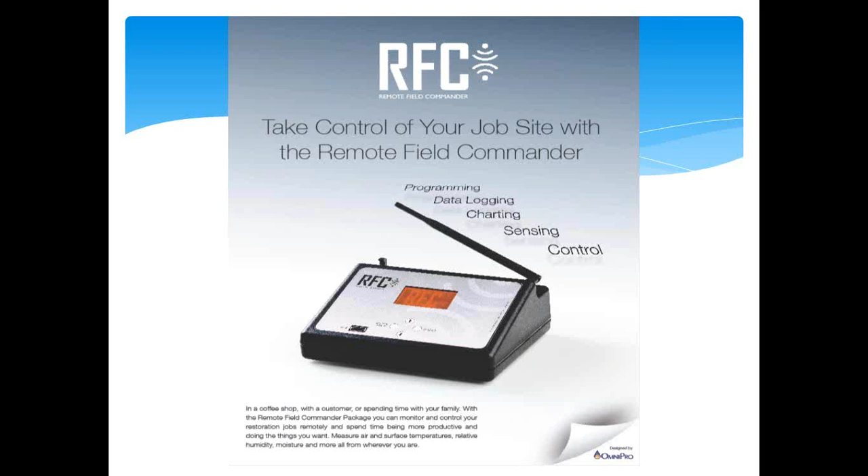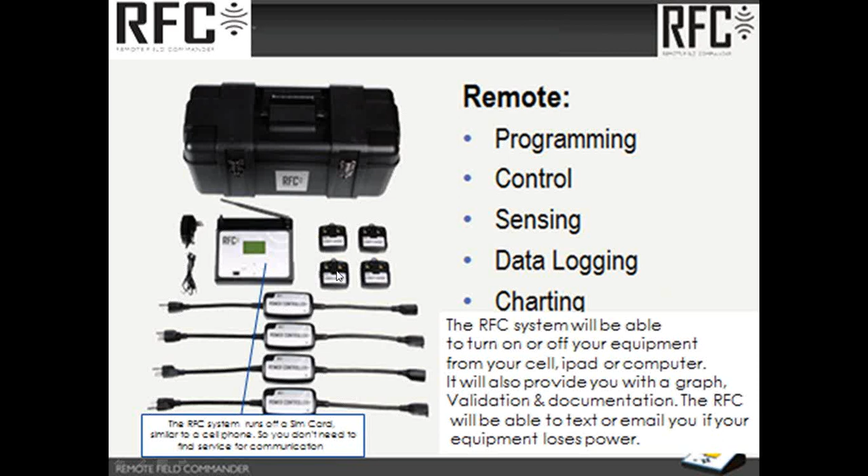This will send a radio frequency to either turn on or turn off, whenever you'd like. The sensors are running off of 5 different readings, giving you air temperature, relative humidity, surface temperature, GPP, and moisture content. So that's 5 different readings at the same time.

All the sensors are going to be in the different rooms, the affected rooms as well as the unaffected rooms, so you can see the comparison. That information is sent to the web browser, and from your cell phone or computer you can turn on or off. You can actually run up to 14 sensors and 14 remote power controllers in one home or commercial building.

There is a monthly service charge for the base station. It's $95 a month. However, in Xactimate, the code WTR remote is $55 a day.

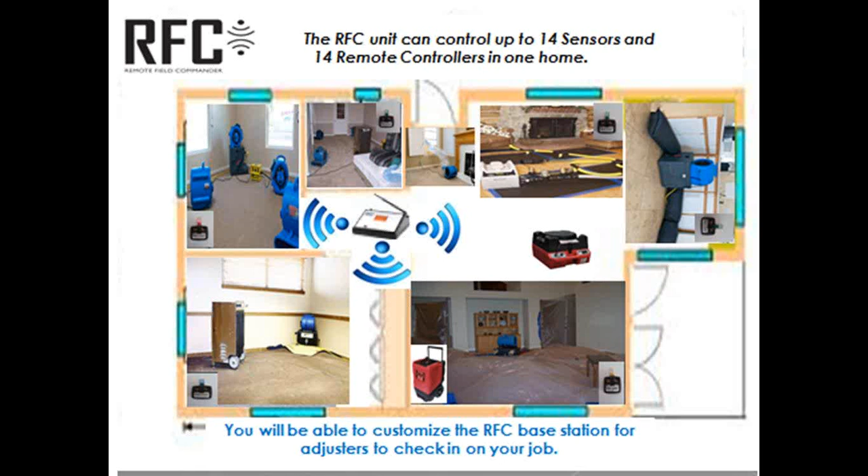If you guys live in New Jersey or New York, you have a job that's an hour and a half to 2 hours away depending on traffic, and you don't need to actually go on the job maybe the second day, but you need and are required by the insurance carriers to have all your data. With this equipment, you can save time and save gas. So if you're interested, let us know, we'd be glad to talk to you a little bit more about this.

It does provide you a graph and a timestamp, and because the information is going into the cloud and you cannot delete or manipulate the readings, you now have third-party verification of what's going on in the environment.

Right now we have a 90-day money-back guarantee trial period. It is $19.95, and there is no monthly service charge for the first 90 days. During the trial period you don't pay any monthly service charge, but if before the 90 days is up you're not happy with it, we will refund your money.

So let's talk about the TES and E-TES. Extraction is still very, very important when we're on a flood job.

However, if you have a TES or an E-TES, the new E-tes low-profile unit now has gone from 22 inches in height down to 13 inches in height. The air mover comes in from the backside instead of on top, and all air movers in the industry now fit. I know we had some difficulties with some other ones, but the design is a lot different now, a lot easier to carry, and we did change the heating element, so we are getting a little bit more heat.

And the unit's only 36 pounds to carry. I will tell you right now that the response from the customers are unbelievable, they just love the system. You will use the E-tes along with your dehumidifier. This does not replace dehumidification, it works with your dehumidifiers, and we'll talk a little bit more about that.

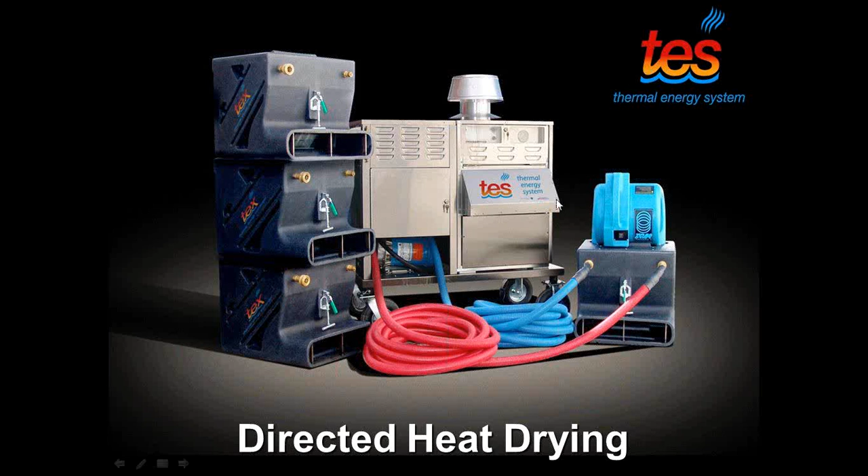Don't forget, we also still have the actual TES unit. This is what we actually started with. This system here runs off of a boiler system. You are going to get a lot more heat out of this system. It only runs off of 8 amps and 1.5 to 2 gallons an hour of propane.

And how the system works is the heat goes through the boiler system, through this red hose, through the gray box, through the blue hose. All it's doing is flowing with hot fluid. The air mover grabs the heat and transfers the heat to where you want it to go.

There is a 200,000 BTU system that you get 4 boxes with, and you can add a 5th if you want. The 250 system comes with 5 boxes, and you can add a 6th. In Xactimate, you're getting $1,700 a day.

But the heat coming out of it, it's super quiet and running only off of 8 amps. You can't beat it.

We do have a demoed unit that's going for $19,995. That's with a trailer. It comes with an E-tes Classic, shelving, propane tanks, you name it. It's ready to go. It comes with free admission to Planning to Win, which is $11.95, and we also pay half of your Reach Drying Academy class, which teaches you how to dry a structure in 2 days using the E-tes and other systems. So if you're interested, give me a call and we can talk a little more about that.

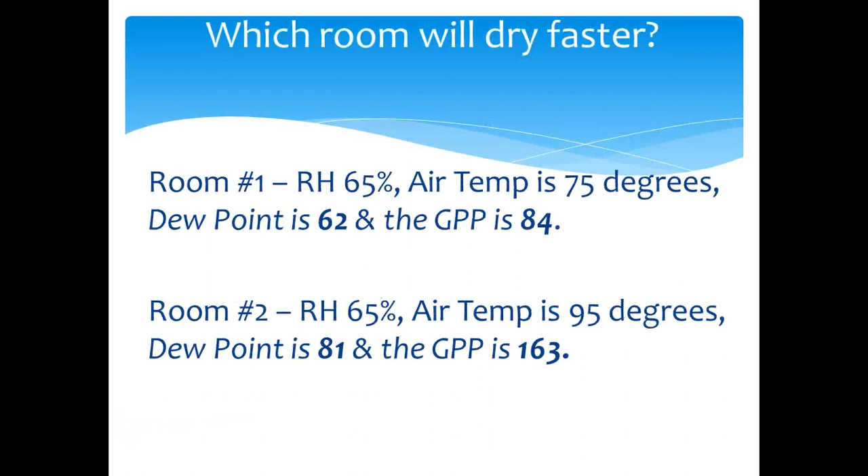Which room will dry faster? Room number 1 has a relative humidity of 65%, air temperature is 75 degrees, GPP is 84. The other room is 65% relative humidity, air temperature 95 degrees, and the GPP is 163.

Now, I did not give you one measurement of readings because you don't track it now, so I'll share it with you later. But which room do you think will dry faster? Most people will say room number 1 because the GPP is lower. Some guys will say number 2 because the temperature of the air is higher.

But if we say number 2 because the temperature of the air is higher, our GPP is off the charts. And we've been taught that if we lower the grains in the room, the moisture comes out of the material. So if we lower the grains, guess what also is lowered? Your dew point. If I lower the dew point, your dehus actually become less efficient. So what dehumidifiers love is high GPP, high dew point. That means you're actually going to get more water in the bucket.

All manufacturers who make dehumidifiers have to do a test rating at AHAM, and it's 80 degrees temperature, 60% relative humidity. But then they do another testing. It's called saturation, and that's at 90 degrees temperature and 90% humidity. The reason they do that is because then they can actually get more water in the bucket, and they'll say, well, we got 130 pints at AHAM, and we got 230 pints at saturation.

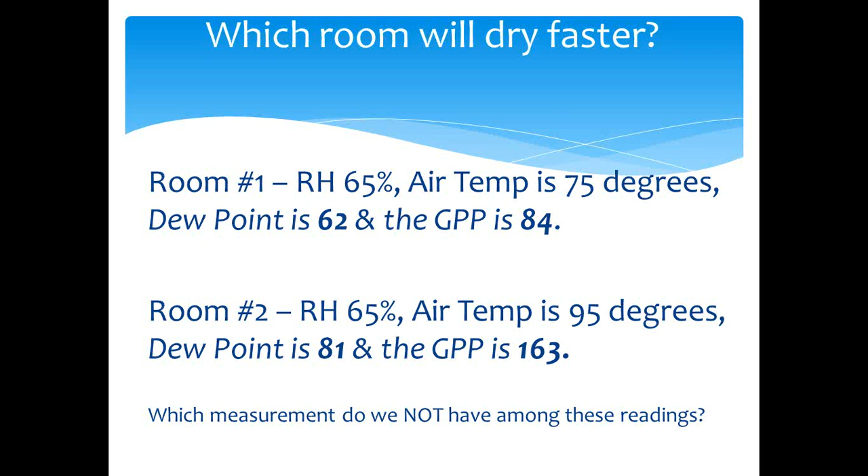So what that really means is this: if the temperature of the air is hotter and there's more humidity in the room, your dehus actually work better. And that's what the TES and E-TES does. It's actually going to make your dehus work more efficiently instead of less efficiently.

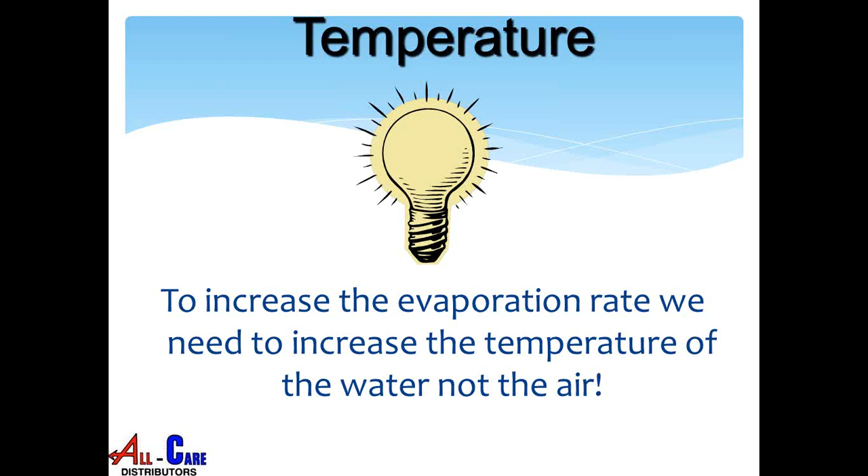Something to think about. Here's a fact: to increase the evaporation rate, we need to increase the temperature of the water, not the air. When you and I were little kids, the teachers taught us, every single time you heat water, it will evaporate. She never said every time you lower the GPP in a room, you'll evaporate the water. Guys, outside of our world of drying, the science of evaporation in high schools, elementary schools, and universities is all based on vapor pressure. And that's what we're going to discuss today.

One of the hardest parts to dry in a wet structure is the sill plate. Okay? You know that, and I know that, right? So the hardest part to dry is in the sill plates. So what happens is a lot of guys cut the drywall because they're afraid of mold, right? Well, let's say Ernie's master bedroom's flooded, and the temperature of the air is 70 degrees.

If the air temperature is 70 degrees, what's the temperature of the wet material? It's not 70 degrees, because that would mean it's the same temperature as the air, which means it's dry. It would be cooler. And then we put air movers across this wet material every 10, 12 feet, because that's what we've been taught. And when the material is wet and we've got air movers blowing across it, guess what happens to the temperature of the material for a while? It actually cools down, and your evaporation slows down.

And that's the reason why, guys, it takes 3, 4, 5 days to dry your wet structure. Now, the reason why the IICRC or S500 already says that you need to track surface temperature, and the new revised S500 is going to say the same thing, is because of this.

For every 18 to 20 degrees that you raise the temperature of the wet material, you double the evaporation rate. Let me repeat that again: for every 18 to 20 degrees that you raise the temperature of the wet material, you double the evaporation rate, or you double the vapor pressure, and that's what creates faster evaporation. So if the temperature of the wet material went from 65 degrees to 85 degrees, you just doubled the evaporation rate. 85 to 105, 105 to 125, you doubled it again.

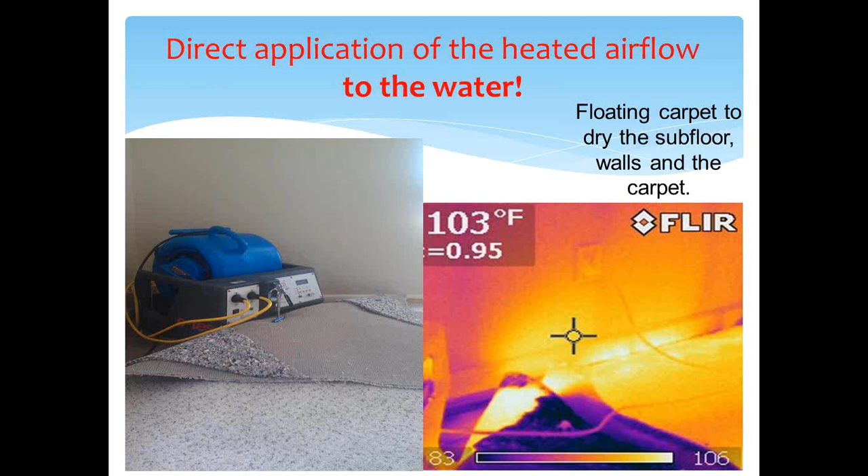So in Dri-eaz, Chapter 7, page 81 of their new guide to restorative drying, it says greater rates of evaporation will occur when liquid water is made warmer and when drier air is moved more rapidly across the wet surface. So what would happen to the rates of evaporation if the water was hotter, not warmer? Then we will increase our evaporation rate.

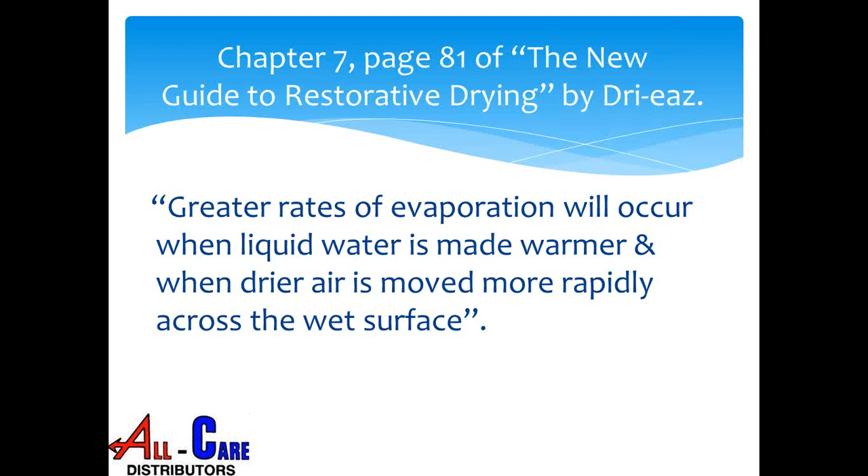So which method would evaporate the water out of the pot faster? I need you to evaporate the water out of the pot. You can put it on top of the stove, or you can put it in the oven at 500 degrees. Which process would dry or evaporate faster?

So we did some testing, and the one in the oven took 120 minutes and 16,000 BTUs, while the one on top of the stove took 24 minutes and 1,700 BTUs. Here's the reason. The reason the oven took so long is the vapor pressure of the water was close to the vapor pressure of the air, and that created slower evaporation.

Here, where all my heat is on the water, the vapor pressure of the water is so much higher than the vapor pressure of the air, and it created faster evaporation.

So when we're drying with conventional dryers, dehus and air movers, gentlemen, your vapor pressure of the wet material will always be close to the vapor pressure of the air. Always. That is the reason why it takes you so long to dry a structure.

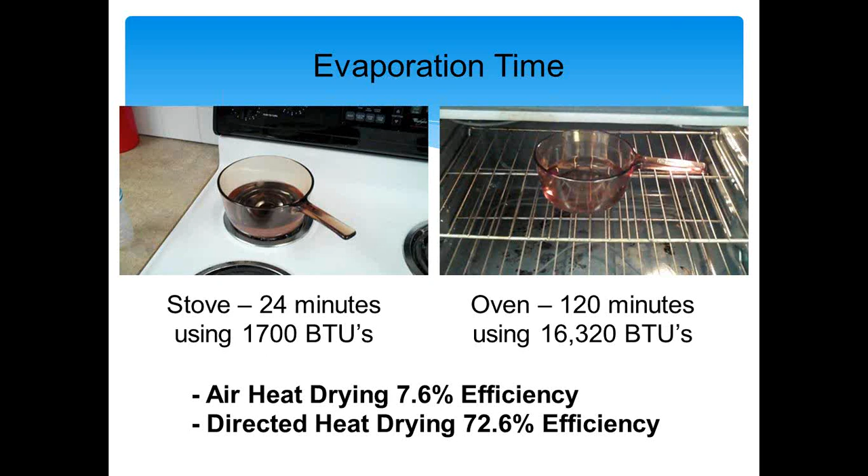So if we can float, tent, contain, direct, and keep the heat to the wet material, and increase the temperature of the wet material, that will increase your evaporation rate and dry your structures faster.

So one TES is good for up to 500 square feet. And for every TES you have to have a large dehumidifier or an exhaust in there. So that's your equation right there.

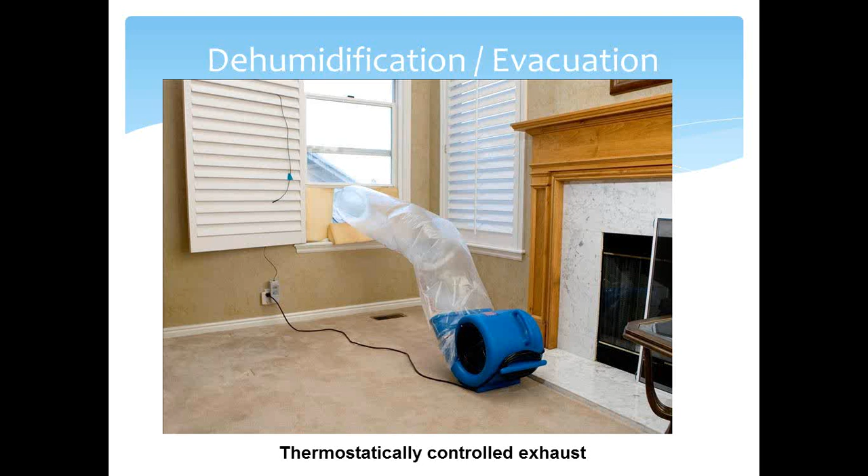Then what happens is, after we're done, the industry usually puts these mat systems down, and then we get some air movers and some dehus in the room.

And where does heat naturally go? It goes up. Where's your water? It's down. So that's like your wife taking her blow dryer in the morning and aiming the blow dryer up in the air to dry her hair. You'd be like, honey, what are you doing? Oh, I'm drying my hair. I'm gonna heat the air first, and then that'll dry my hair. You'd be like, honey, why don't you just aim the blow dryer to your hair? That'll help faster. And then it works.

That sounds like a simple idea, but when you guys are just using air movers and dehus and you guys are just drying the air, that's like you taking your blow dryer and aiming it up in the air. We want to get the heat to the wet material. So on a wood floor, we're going to tent it. We're going to keep the heat down low. Wherever the water goes, the heat's going to go. And every single time we heat water, it will evaporate.

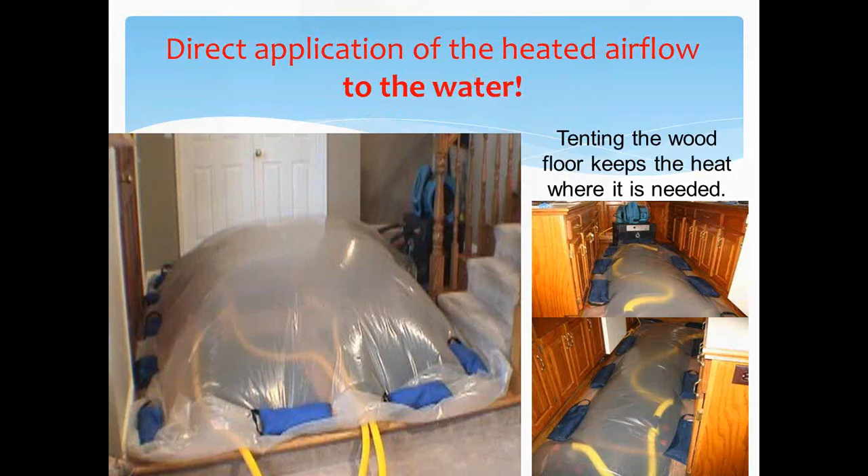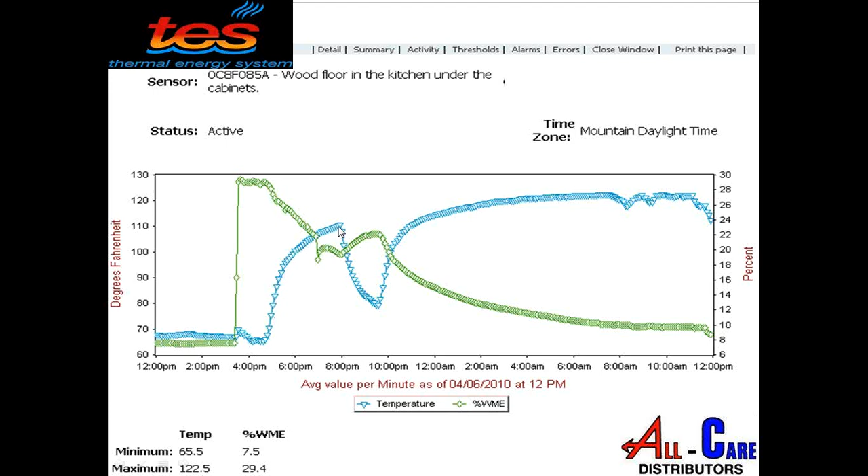Now guess what's happening to the water? It's evaporating. Now if we did not heat the water, how long would this take to evaporate? It's based on science, guys. Every time we heat the water, it will create faster evaporation. You can't deny it.

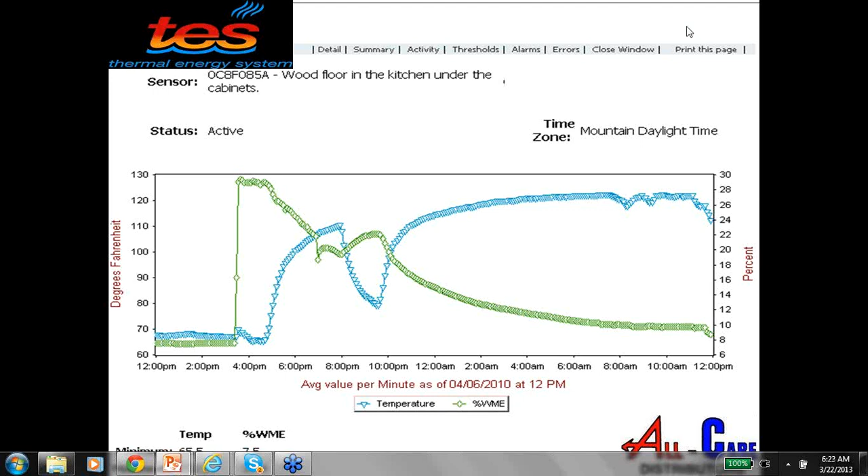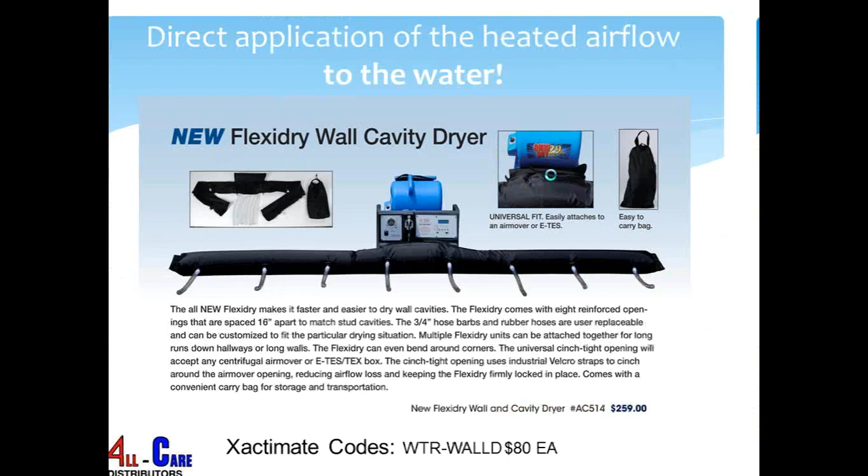Another way of directing the heat would be the Flexi Dry unit. There's Velcro on each side of the Flexi Dry, so you can actually add up to 5 units to one E-TES. And in Xactimate, this is $80 a day. So for every Flexi Dry unit you use, it's $80 a day. So if you just use 4 of these, that's $320 a day in addition to the E-TES and air mover at $225 a day.

And inside the wall cavities, we've got the heat going in. So for commercial units, homes with brick, plaster, concrete, drywall, doesn't matter, figure out where the water's at, get the heat to the water, and that's going to create faster evaporation.

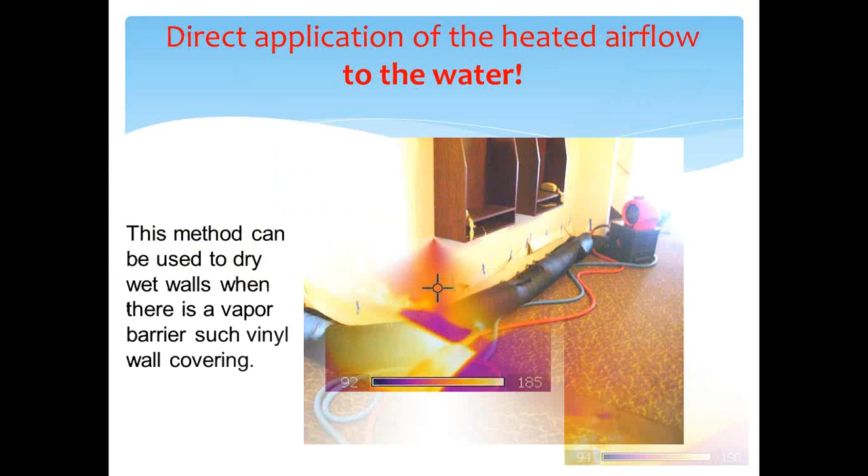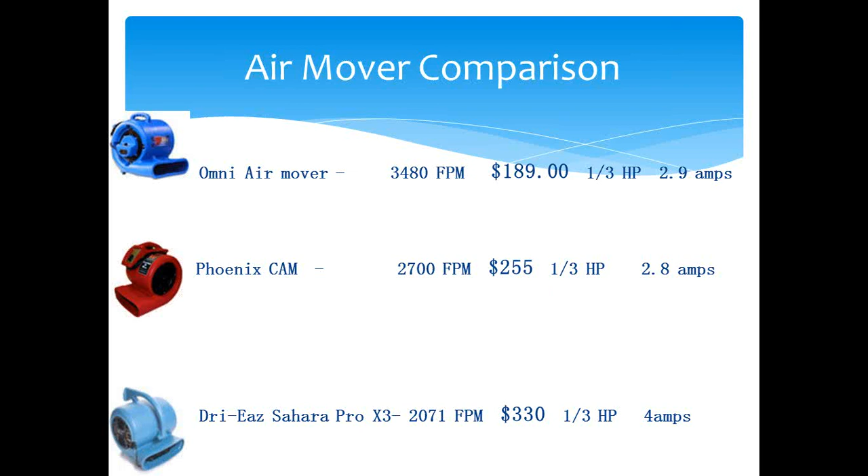The air mover we'd highly recommend is the OmniDry 2.9 amp. It has a daisy chainable feature on it. It's got a 2-speed. And it actually has the highest feet per minute rating in the industry right now at 3,480 compared to the Phoenix and the Dri-Eaz. And you know what, guys? What air movers blow out is air. It's not magic air. It's just air. And for the price of air movers, why spend $330 when you can spend $189? And the warranty is great. And the dependability is amazing.

So that's an option. Now what does the IICRC S500 say? It says heat accelerates evaporation. Heat should be applied directly to the materials. Now this is what today's S500 says. The 2006 version: restorers should manage both air and surface temperature in order to enhance drying and avoid potential-related damage.

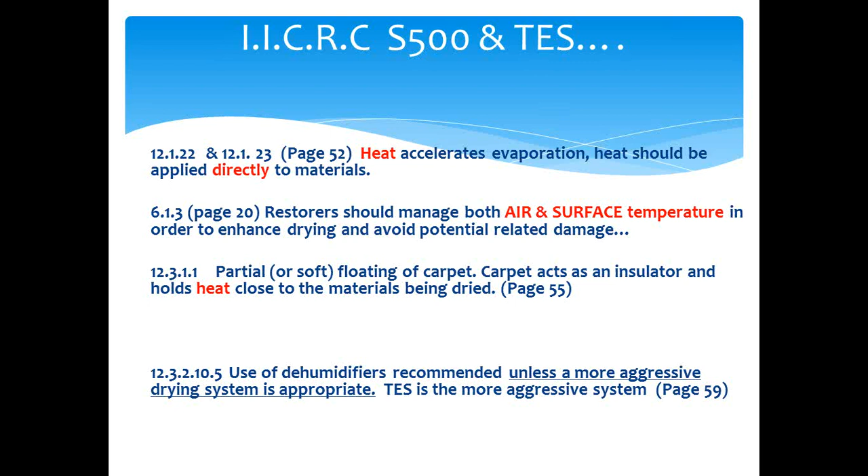Partial or soft floating of carpet. Carpet acts as an insulator and holds heat close to the materials being dried. So when we float it, the carpet acts like an insulation blanket and keeps the heat right where we want it to go. We also have in the S500 it says drying walls, solid wood floors, the underside of subfloors can be accelerated by applying heat to the materials. So I got an E-TES on its back aiming up. I got a reverse tent, and my ceiling or my subfloor is 140 degrees.

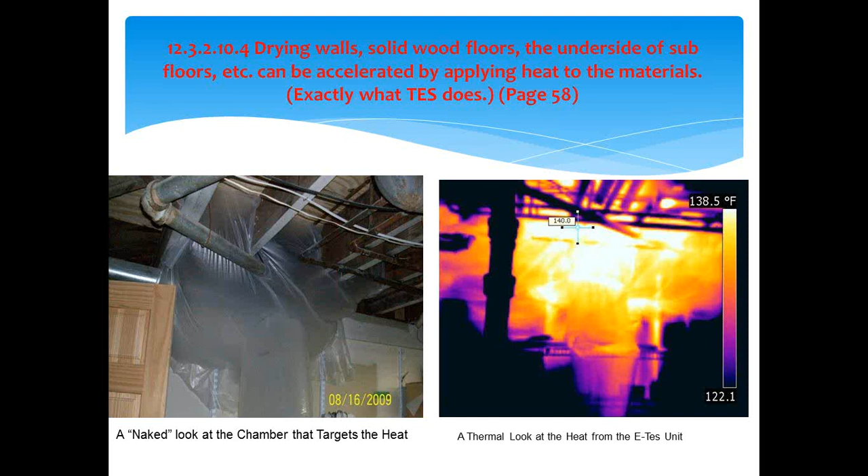Guys, the subfloor is 140 degrees, I'm going to dry that fast. So if I have a wood floor on top, I've got my mat system, I've got that tented, I've got a reverse tent going on. It's going to dry fast, right? It's simple science. So we go back to room number 1 and room number 2.

The one thing I didn't tell you was that the surface temperature in room number 1 was only 70 degrees, and the surface temperature in the other room was 115 degrees. The reason I didn't tell you that is because right now, guys, you don't track surface temperature. So you didn't care about it in the beginning. But if you change the way you look at things, the things you look at will change. Gentlemen, you really need to start tracking surface temperature. It's going to help you keep track of your evaporation rate faster.

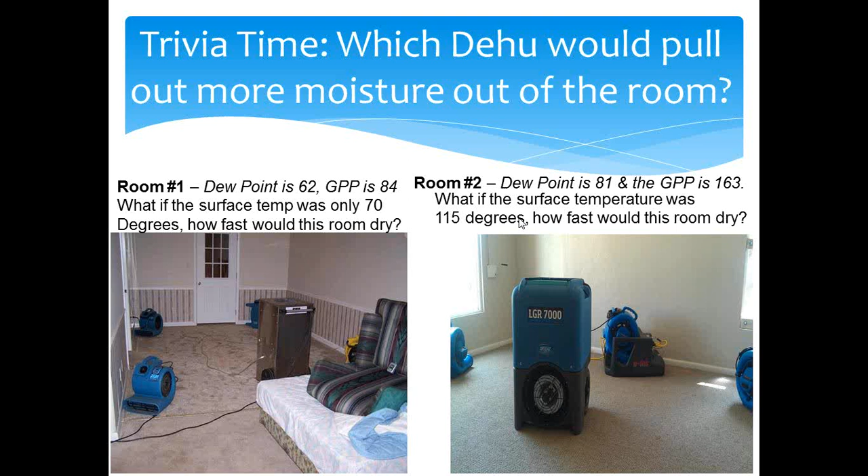What's also in the S500 is the actual definition of psychrometry. It says evaporation occurs if the vapor pressure of the air is lower than the surface vapor pressure of the material. That's the reason why they teach you to lower the grains in the room. If we lower the grains in the room, you lower the vapor pressure in the air below the material, and that's what draws the moisture out. But if we reverse the definition, if you increase the vapor pressure of the wet material higher than the vapor pressure of the air, that will create faster evaporation.

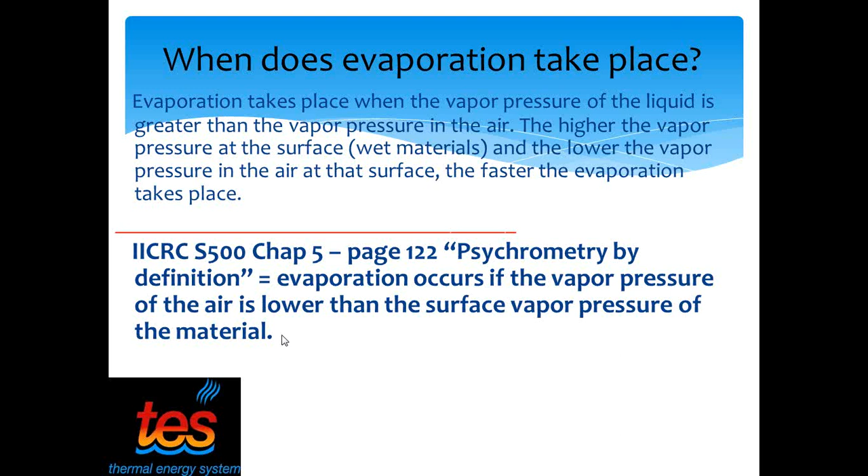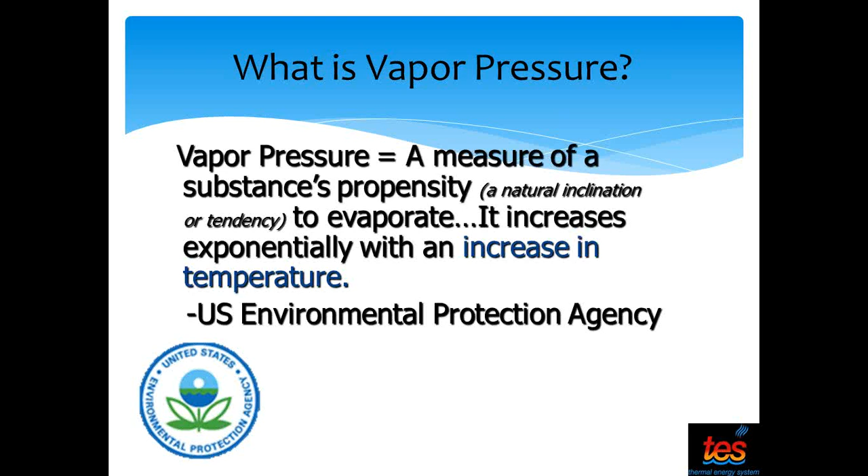What is vapor pressure? Vapor pressure is a measure of a substance's propensity to evaporate. It increases exponentially with an increase in temperature. That's not from TES, not from Dri-Eaz, not from Phoenix, that's from the EPA. That's based on science. The only way to increase vapor pressure in a wet material is to increase the temperature of the wet material. A lot of you have thermal imaging cameras, and if you don't, you need to get one, okay?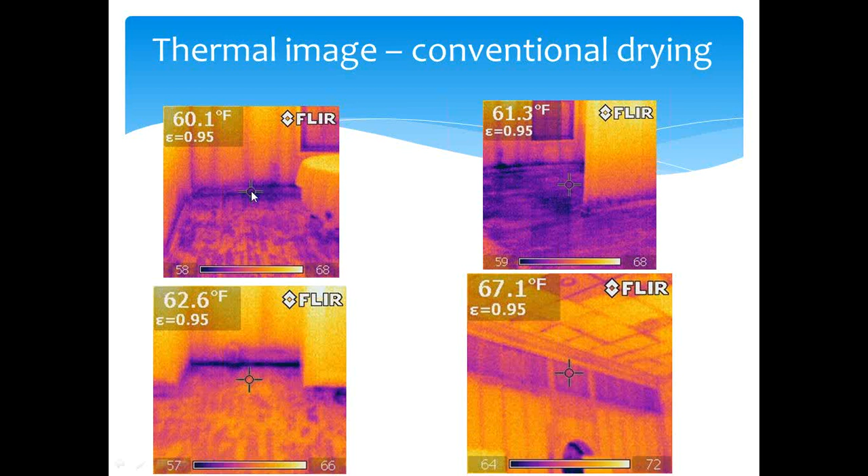Because the technology is amazing. In this picture here, we see that the sill plates are the last part to dry, and that heat rises. So at 60 degrees, do you think you're really going to dry that out fast? No, you're not. But if we direct the heat by floating the carpet, tenting it, containing it, now my sill plate's 132 degrees. Gentlemen, at 132 degrees on the wet material, you know you're going to dry that out fast. And guess what? The baseboard's still on there.

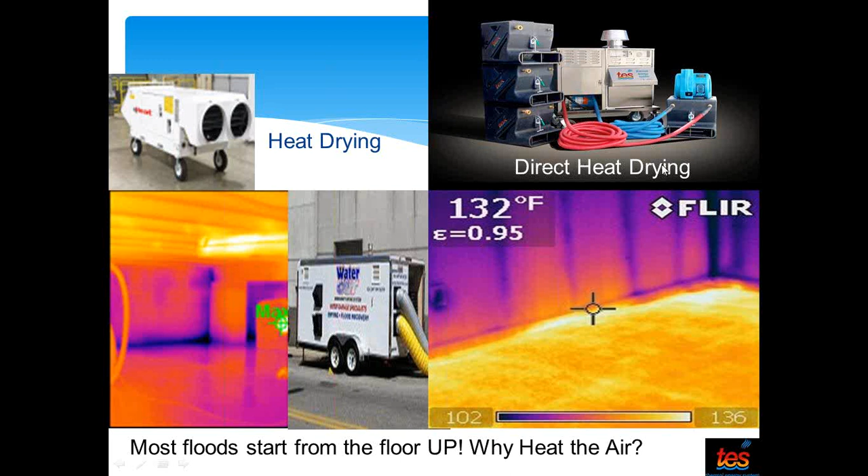Some of you are already thinking, well, I'll just heat the room up. The heat will go to the ceiling and your sill plates will still be the last part. That's why there's a difference between heat drying and direct heat drying with the TES and E-TES. And here again, we're floating the carpet. My baseboard's still on there. And where's all my heat? Right at the sill plates.

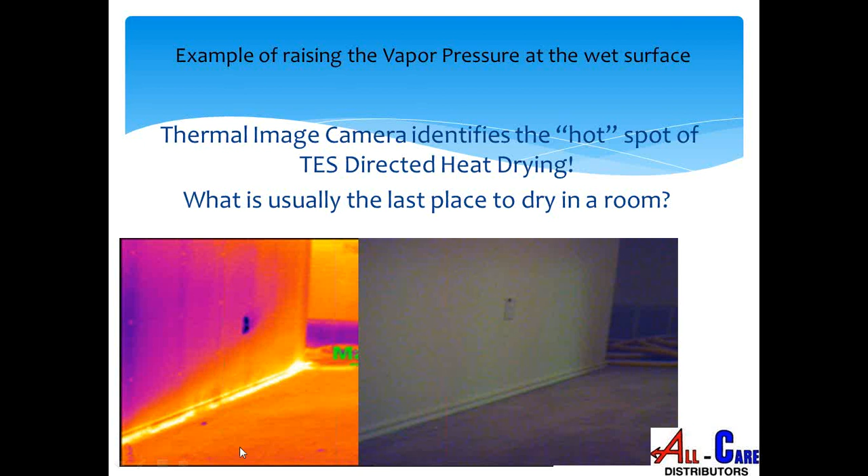There is no way, guys, you're ever going to see this picture if you are just using air movers and dehus, or if you're just going to heat the room up, because heat rises. I need my heat right at the sill plates. That's going to help me dry my structures faster.

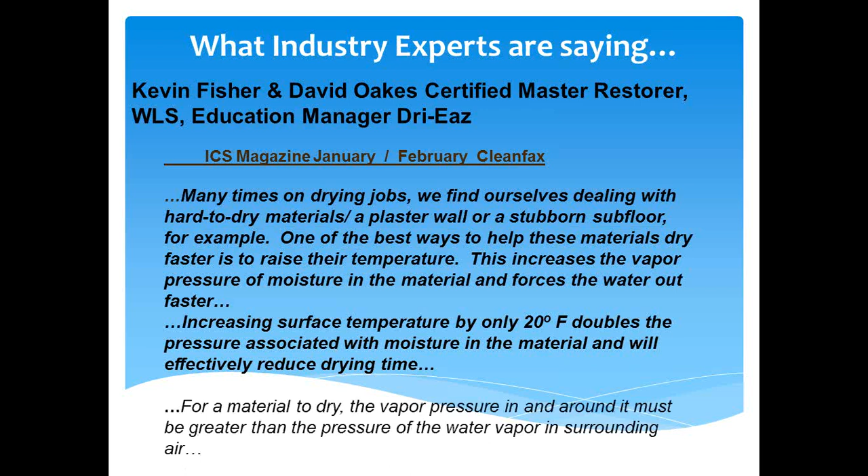So what are the experts saying? Kevin Fisher and David Oakes say, many times on drying jobs we find ourselves dealing with hard-to-dry materials, a plastered wall or a stubborn subfloor. One of the best ways to help these materials dry faster is to raise their temperature. This increases the vapor pressure of the moisture in the material and forces the water out faster. Increasing surface temperature by only 20 degrees doubles the pressure associated with moisture in the material, and we effectively reduce drying time. Guys, this is not new. It's been around a lot, but it just hasn't been promoted in the classrooms.

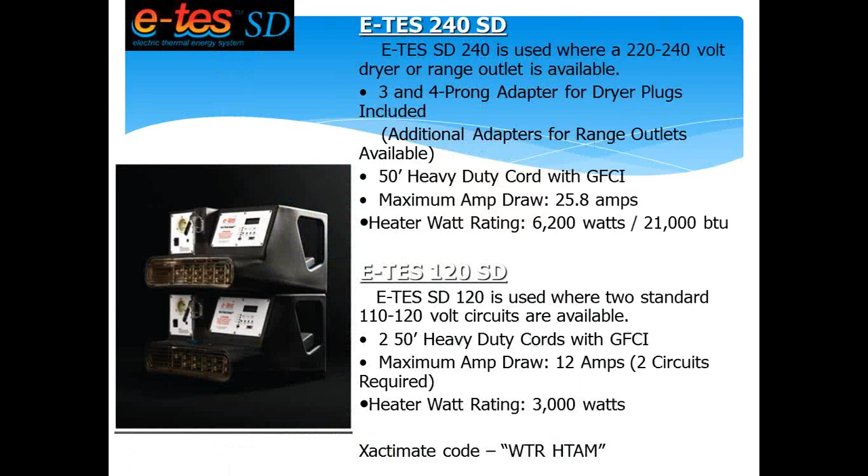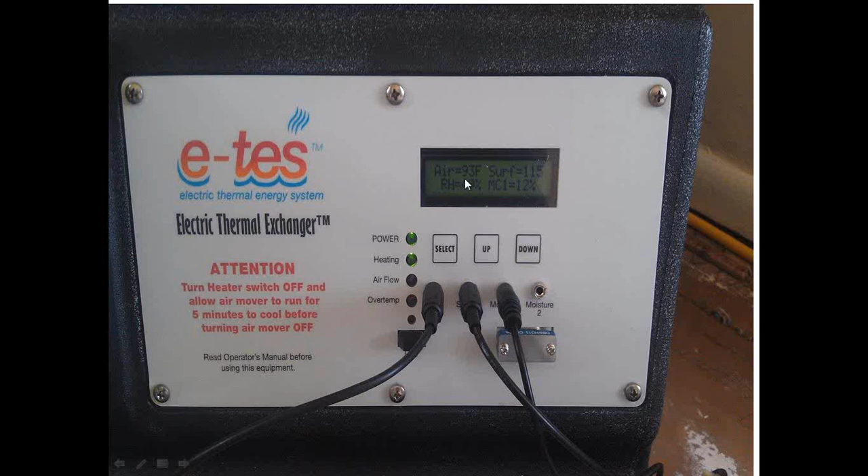So the E-tes low-profile unit, let me show you that you can actually turn on and off the system all by itself. On the screen, it's actually going to tell you what the air temperature is, your surface temperature, your relative humidity, your moisture content percentage, and there's 3 ways of turning off the E-tes. One is the moisture content percentage.

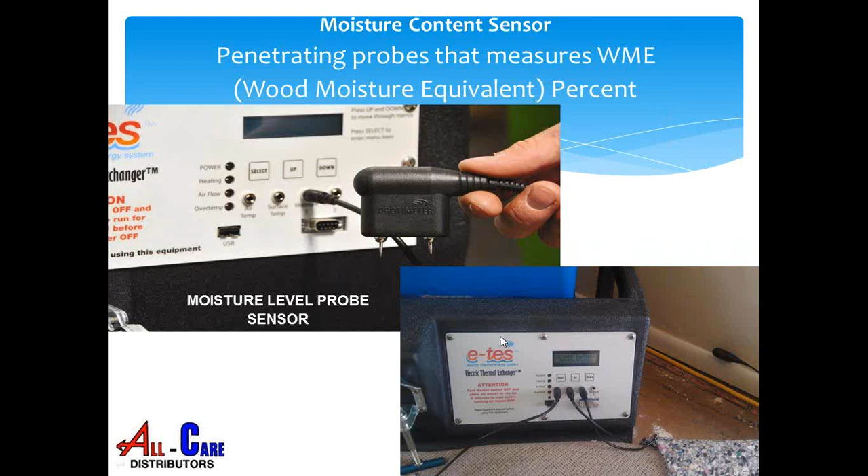So what happens is you always have to find the dry standard, right? So let's say your dry standard is 12%. So you're actually going to input that into the E-tes, and these pins are measuring moisture percentage and surface temperature. So you put these into the sill plate, the drywall, the wood floor, whatever you like. Once it reaches the dry standard, it'll turn off the heating element and stay off. So you don't need to worry about over drying anything.

The other one is the air temperature. Let's say I don't want the room temperature to get over 100 degrees. Not a problem. I'll set the E-tes at 100 degrees. I'll put this at eye level, 6 feet maybe, tape it to the wall, and once it reaches 100 degrees, it'll turn off the heating element. At 97, it'll go back on. It turns it off, turns it on, turns it off, turns it on.

Now some of you right now are thinking, you know what, that's too hot for the customer, they're not going to like it. So my question to you is this, and you can offer this to your homeowner. Mrs. Jones, I have an option. I can dry the structure in 4 days, or I can dry it in 2 days. If I dry it in 2 days, it's going to be pretty warm and pretty quiet. If I dry this in 4 days, it'll be a lot more comfortable and very loud. What would you like? And what do you think the homeowner's going to do?

She wants this nightmare to end. But you're also going to make basically the same amount of money in 2 days instead of doing it in 4 days. It also has a remote exhaust controller, so you can set the air temperature exhaust at 95. It'll send a radio frequency and turn on your exhaust if you want. It'll turn it on and turn it off.

Surface temperature sensor, you set this to take it down to the wood floor if you like. And let's say you don't want the wood floor to get over 110, 115 degrees. So we tent it, set the temperature, whatever temperature you like, and it turns off and turns on, turns off, turns on. It's kind of like having a technician on the job.

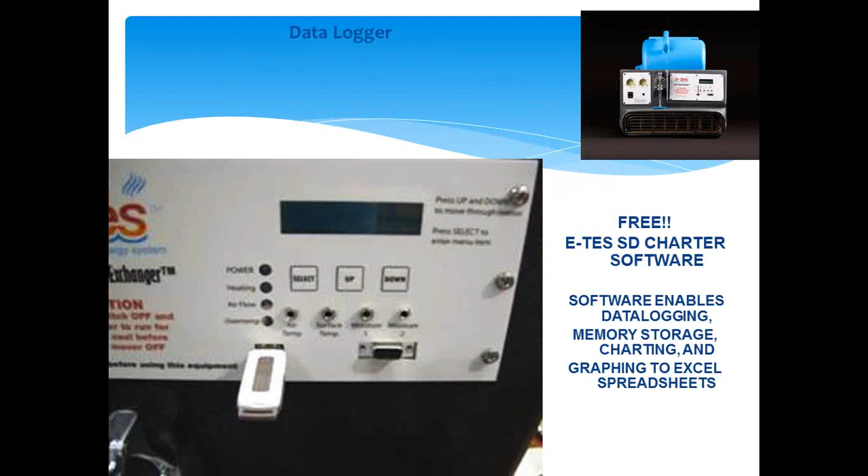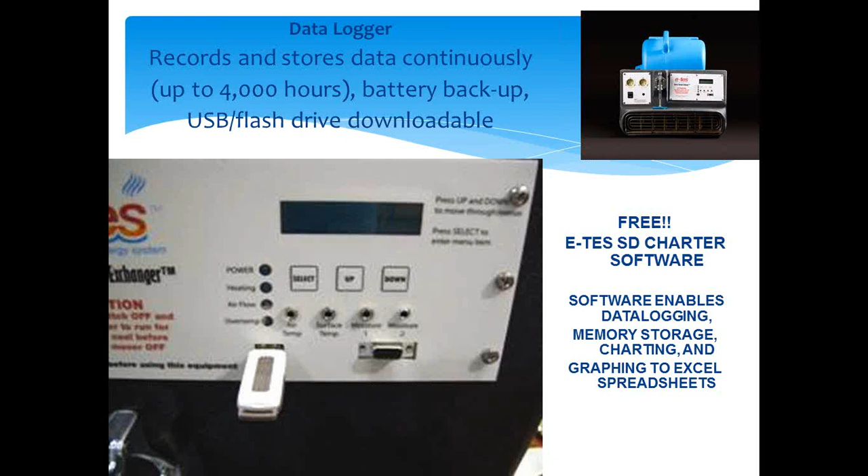The E-tes also is a data logger. Software is free. What happens is you download the software from a website at testdryingsystem.com. When you go check on the job, turn off the E-tes, put in your flash drive, put it back on. It downloads all the information, and now you have a graph to document everything that's going on.

I do CE classes around the country. And let me tell you the biggest difference that I've learned in 3 years from the insurance side, and this is from the East Coast to the West Coast, north to south. The biggest difference between an independent restoration company and a franchise is this. 30% of the independent restoration companies document and validate their jobs. 85% and plus for franchises document and validate their jobs.

That is the biggest reason insurance carriers like to use franchises. Guys, you have DUs, you have air movers, you have great customer service, you have the knowledge, but you're not documenting the jobs properly.

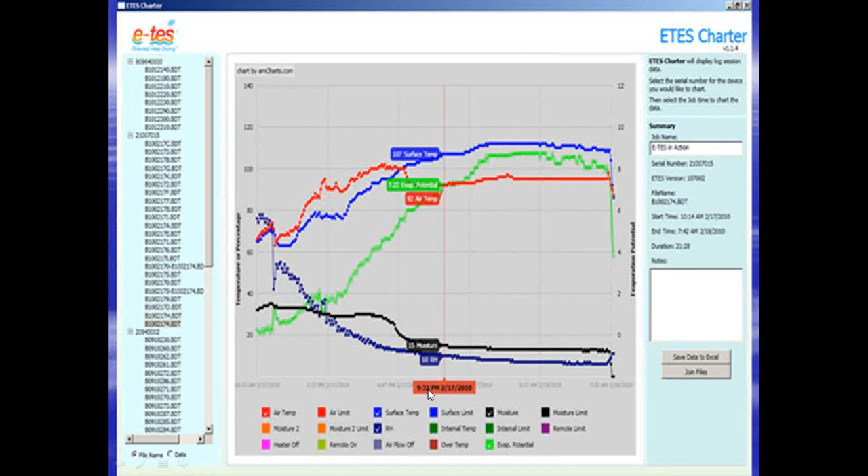So that means 70% of the independent restoration companies do not document or validate their job as done. And with this promotion of the E-tes as well as a remote field commander, now you will have charts and timestamps of what's going on in your environment. So the E-tes will give you 16 different readings. You just click on which graph you want to see. So we have surface temperature, air temperature, relative humidity, moisture content, time, date. You have all that documentation.

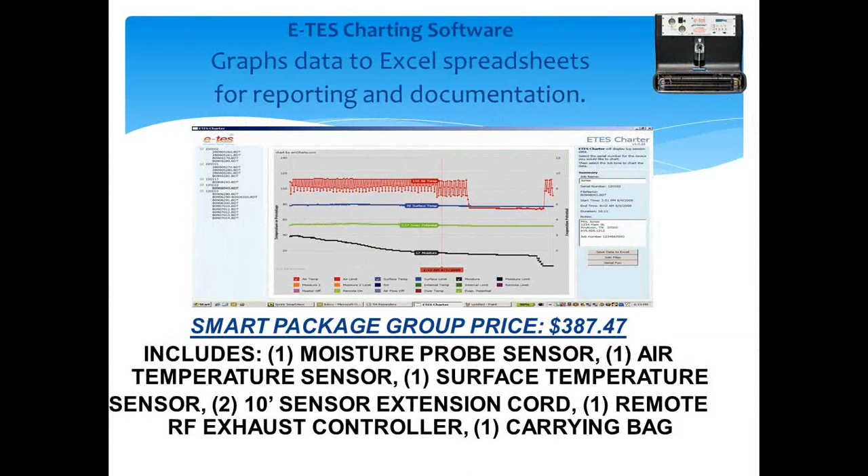So when you purchase the E-tes, I recommend getting the Smart Package kit with it. That'll give you a moisture probe sensor, air temperature sensor, surface temperature sensor, two 10-foot extension cords that you can extend the readings out, remote exhaust controller, and a carrying bag.

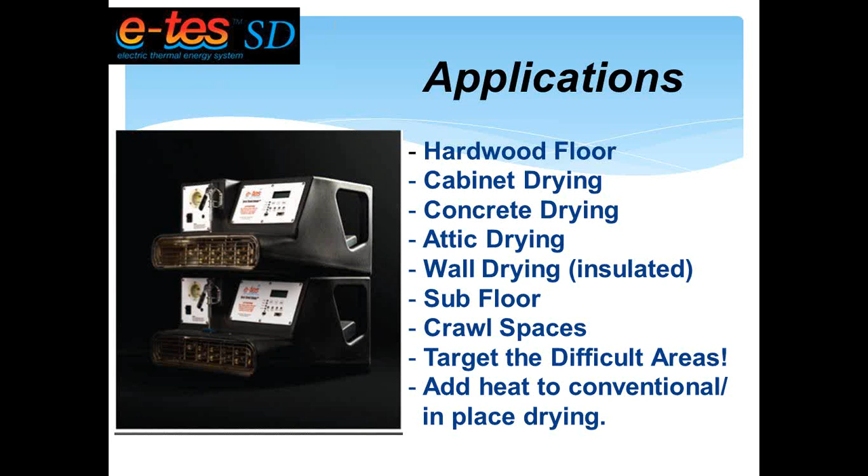So if you can't float the carpet and you want to just do a top-down drying, that's fine. You can do that. You can float the carpet. That's where you're going to get most of your heat, though, to the sill plates. You can use the Flexi-Dry to dry out cabinets, cupboards. You can use it for wall drying. You can put the E-tes on its back. You can use the E-tes with lay flat ducting. This is 14-inch lay flat ducting. Okay, we're not trying to burn a house down, gentlemen. We're just trying to increase the temperature of the wet material.

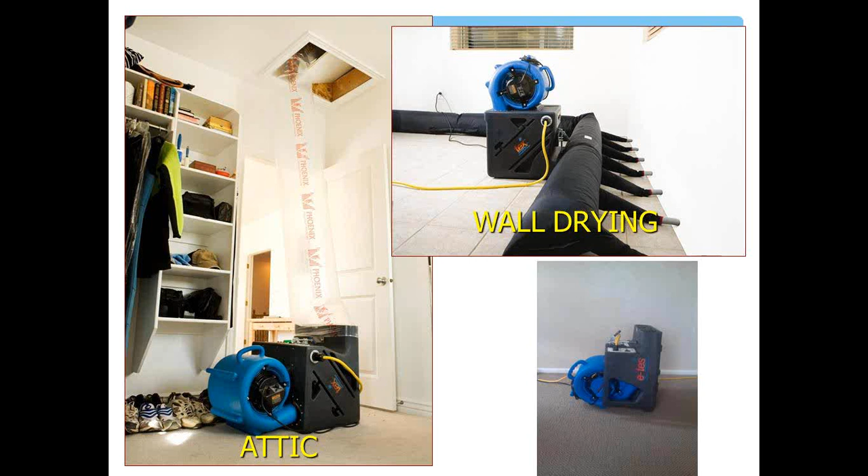And so before I finish, I will tell you this. Whatever the temperature of the air is going into the air mover and through the E-tes, you're going to increase it about 30 degrees. So if the air temperature is 70 degrees, the temperature coming out of the heat is 100. We actually want the temperature of the air about 95. I do not want the air temperature at 120. I want the wet material at 120, but I don't want the air temperature. So about 95, between 90 and 100 degrees, is a great temperature for the E-tes to work, and you don't have to worry about over drying a lot.

In addition, you can use the E-tes with the GMS distribution box. This distribution box has already the two 4-prong adapters, two 3-prong adapters, 30-foot extension cord, and a carrying case. And it has four 20-amp breakers. That means that you have 48 usable amps, regardless if you plug it into a dryer or a range. So that means you can plug in two E-tes units, 20 air movers, or 12 air movers and two DUs.

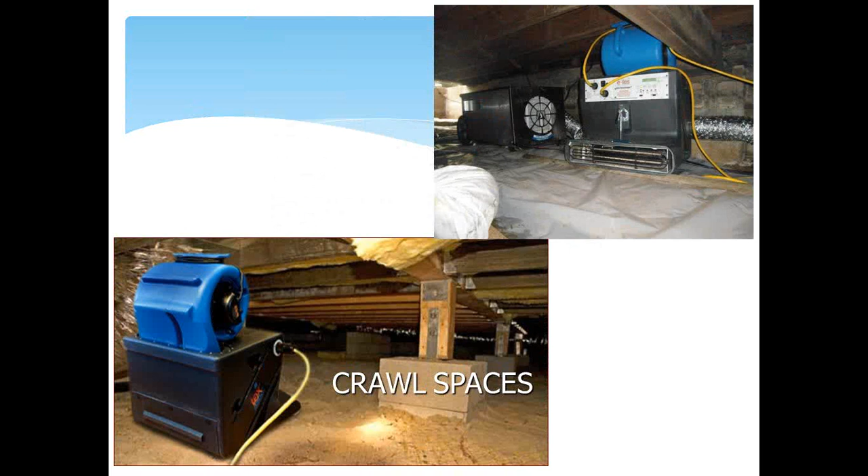You can also use the E-tes in crawl spaces as well. So again, gentlemen, ladies, I really do appreciate your time to help you understand the science of direct heat drying. I don't see any questions in the chat room or the question box.